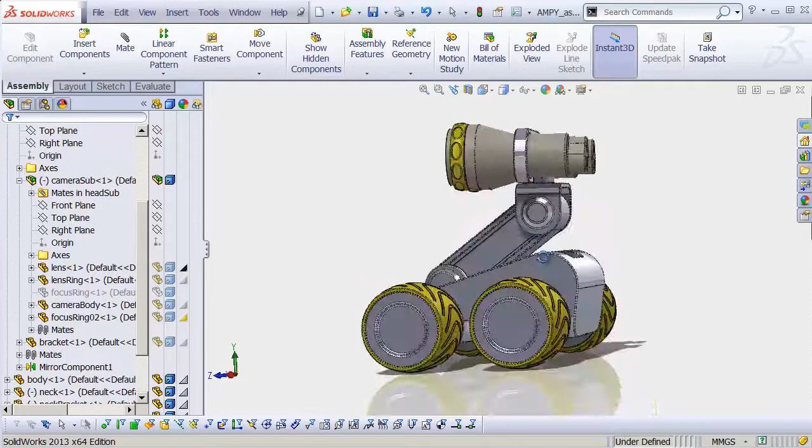So if it's kind of an artsy person you want to show, you can come up here to your View menu. You can turn on those shadows. That kind of helps a little bit. Come down and turn on perspective. That helps a lot more, kind of making things look a little bit more three-dimensional. And then you can even add an ambient occlusion layer, which looks okay in SOLIDWORKS. It definitely adds drama. You can see that especially in areas where there's a lot of negative space, it definitely helps to pop things out.

Unfortunately, it's just very low resolution and kind of grainy, so it can make your object look a little dirty as well. But, I mean, it's pretty cool, right? Obviously you get a little bit of drama out of that, which is nice. So let's say we can kind of take a snapshot of that. We're good with this. We could save out that image and send it to somebody so they see what it looks like. But there's a good chance if you wanted to send it to, you know, an engineer or something, they're going to want to see something a little more technical. They'll want to see a drawing.

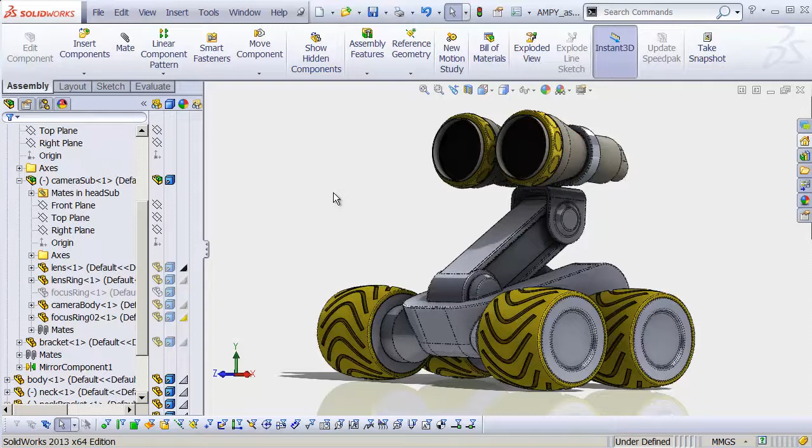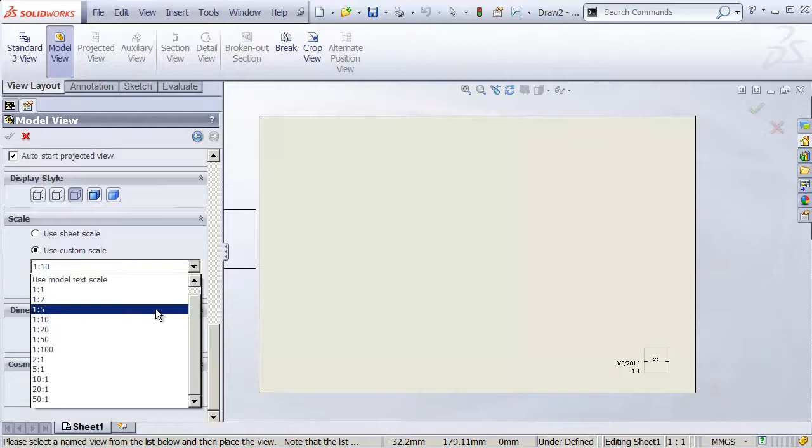So let's hit Control N and create a new drawing file. Hit OK. And by default, it's going to show us any open documents. And in this case, we have our assembly document open. I'm just going to double click that here. And then come out in my viewport and let's drag down to the bottom of this model view import feature. And we're going to use a custom scale here. And I'm going to set mine to 1 to 5 because that looks like about the right size.

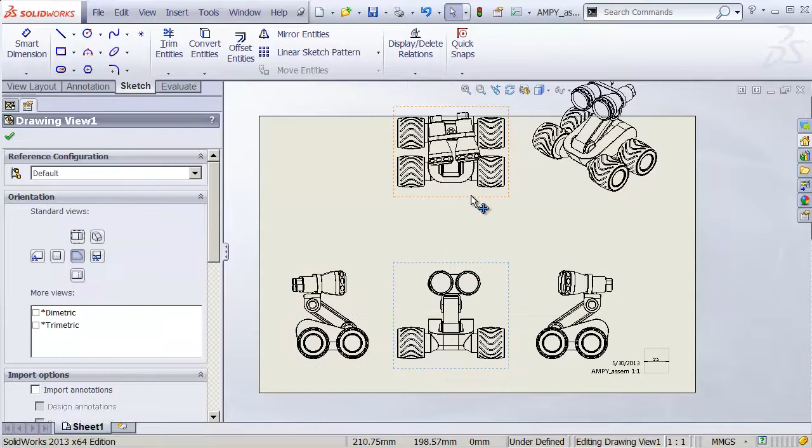And I'm going to click to create a front view. We'll click for a left view and a right view, and then how about a top view? And then diagonally off here to create an isometric view. Hit Escape to drop the tool, and then just drag these into place to position them as seems appropriate for this drawing. All right, now we can just position these where we want them to be.

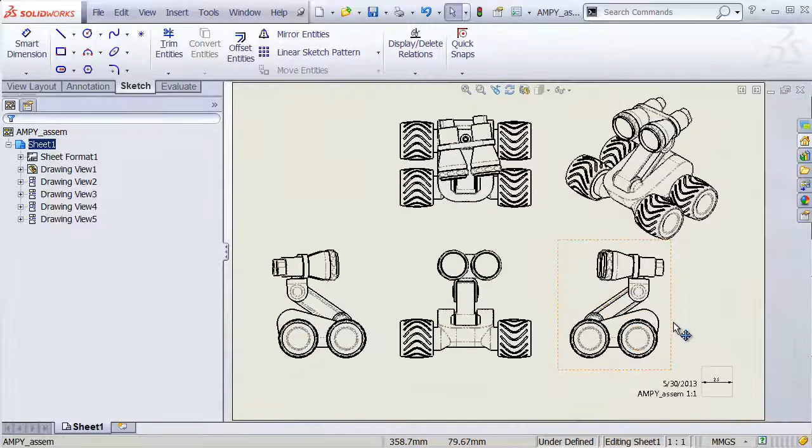Let's drag over them just to box select them. Right click, tangent edges with font. You can actually make that the default in SOLIDWORKS as well. I just haven't bothered with that. And there we go. We now have a completed drawing. And if you wanted to create some dimensions, you could.

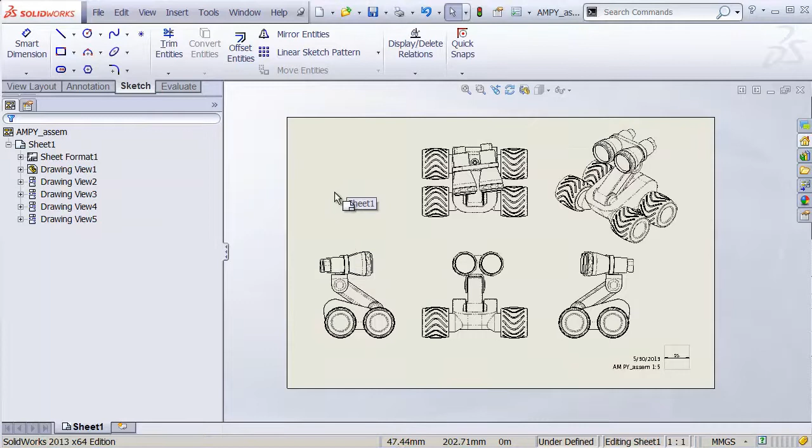Don't forget, though, we just set this to be a 1 to 5 drawing, and this says it's 1 to 1. We might want to edit the sheet format. Double-click here and set this to 1 to 5. As you know, you could make that automatic, but since I typically don't do that, that's just a hack we'll have to do for the moment. So we now have a drawing. Isn't that cool? Let's go File, and I'm going to save that in the same folder with my assembly. And here is just the magic. This is the magic about doing drawings in this way.

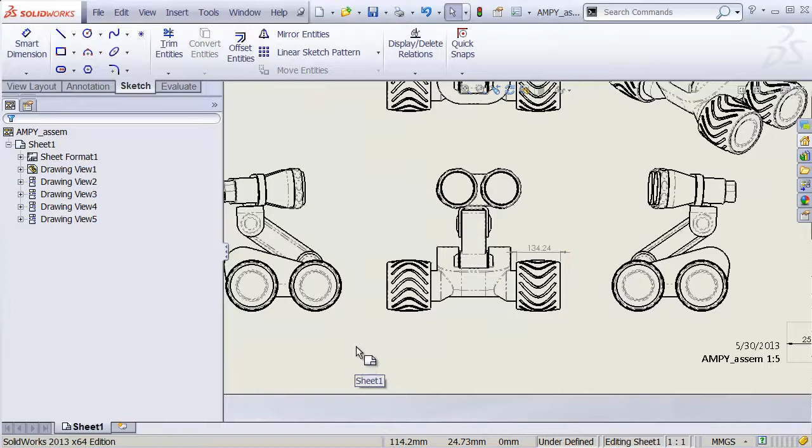Let's zoom in here, and let's assume that we want to show somebody a dimension. Let's grab our Smart Dimension tool, and I'll put a dimension between here and there. And that's 134 millimeters. Perfect. And so that's what we want people to see. It's just how big that is. We'll just drag that up there where it's nice and visible. Yay! And then they say, well, actually, we want it to be a little bit bigger or something like that.

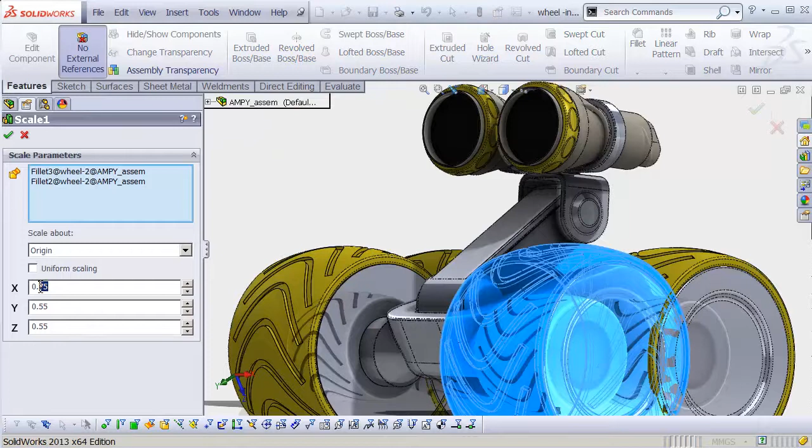So let's go back to our assembly. I'm going to edit this part. Let's edit this part in context. Drop down here. I'm going to edit that scale operation. And on the x-axis, let's make it 0.8 instead of 0.75. Hit OK. Let's go back now to our drawing.

It thinks for a second... zoom in here. Uh-oh, the number has changed. The drawing has updated. Everything is up to date. So any change we make to our model is automatically updated in our drawings.

This is huge stuff. If you've ever spent hours in Rhino trying to manually create 2D drawings from your 3D CAD, you're never going to want to do that again. In fact, I've had students who insisted on modeling in Rhino, but they would still come over to SOLIDWORKS

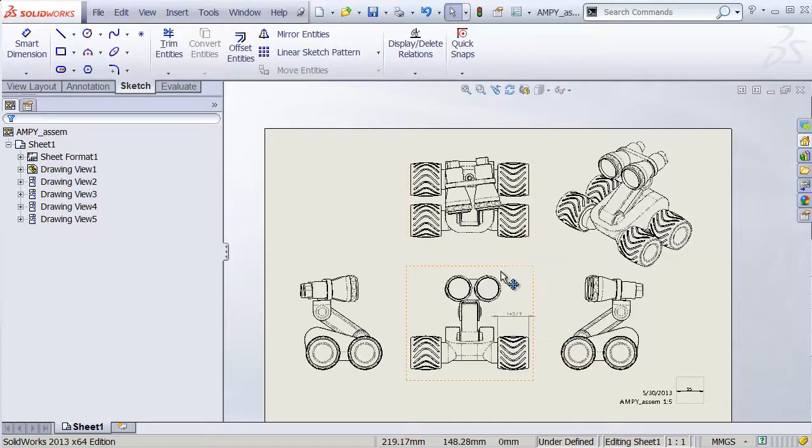when it was time to create their drawings, just because it's so much easier to do it this way. Let's look at a couple of other little features of drawings, just for fun. I'm going to close this up and save it. Let's go File, New, and create a new drawing document.

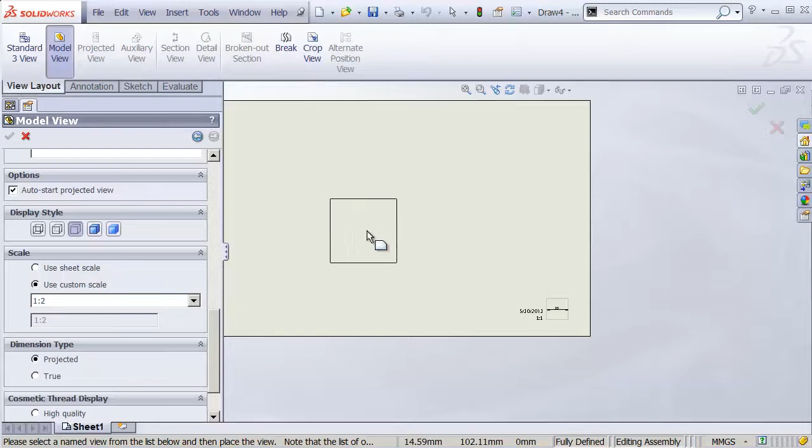I'm going to browse and insert that camera subassembly by itself, just the camera. In the custom scale, let's set that to 1 to 2. That looks good. Drop in a couple of views and hit OK. That'll work perfectly for our purposes right now. Let's just move these over a little bit.

Now, there are a couple of things we might want to see from these. Let's first set these to be tangent edge with line font, as we said before.

Let's head up and do a section view. Now, I want this to be on the other axis—we're going the wrong way right now. So if I hit the Tab key, that switches between the two axes, so I can just toggle there.

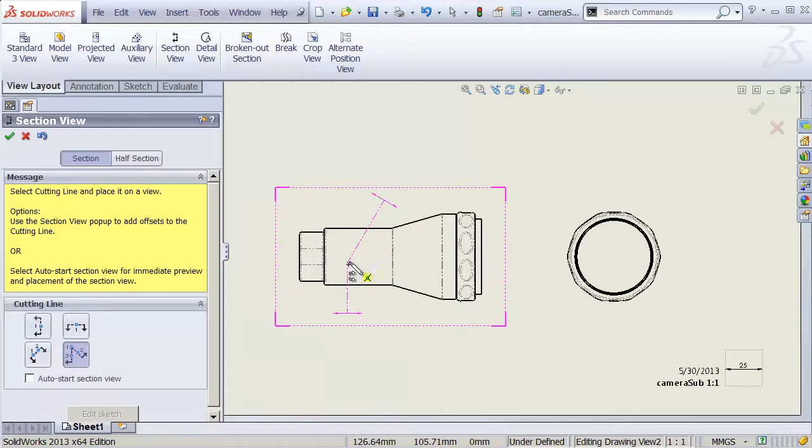Let's go right to the middle here and click OK, and OK. Then move up here and click one more time. Now we have a section view of our model.

Really nice and clean. Now, if you're working in SOLIDWORKS 2012 or earlier, that whole process might be a little bit different, but just play around with it. It's pretty straightforward—you'll really be surprised how easy it is, I think.

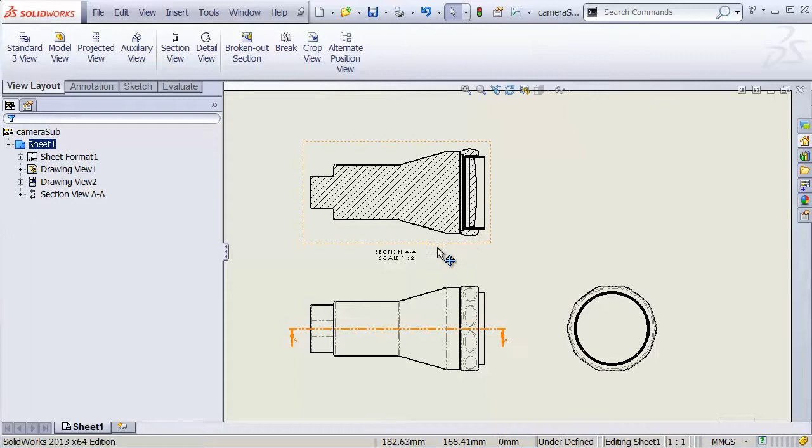Then actually, if you want to create a detail view, this is really fun—I love detail views. Let's head up to our detail view command. Let's say we want a detail of this area right here. We'll just circle the area we want to look at, then move up here and drop the detail view wherever we want it.

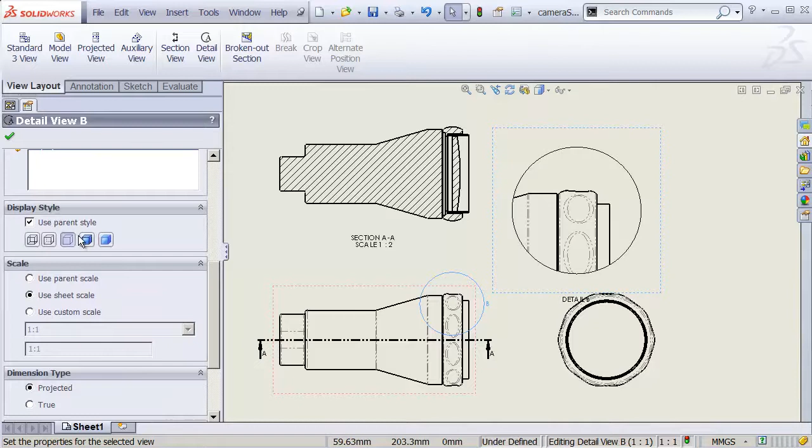Now in the detail view properties, there's a lot we can do. One of them is, for example, to add a full outline all the way around that thing, and drag all the way down. You'll notice under display style, we can actually change that to shaded. Really nice—this gives us a really close-up idea of what's going on right there in the drawing, and there are lots of reasons why you might want to do these kinds of things.

Very useful stuff. So I hope drawings are going to be useful to you in sharing your work in SOLIDWORKS. Obviously, if you're doing really technical drawings, like for actual engineering purposes, these things get a lot more detailed and technical. But for our purposes right now, I just want to open this up to you as a tool to play with and use to communicate your ideas to other people quickly, fluidly, efficiently, and just see where that takes you.